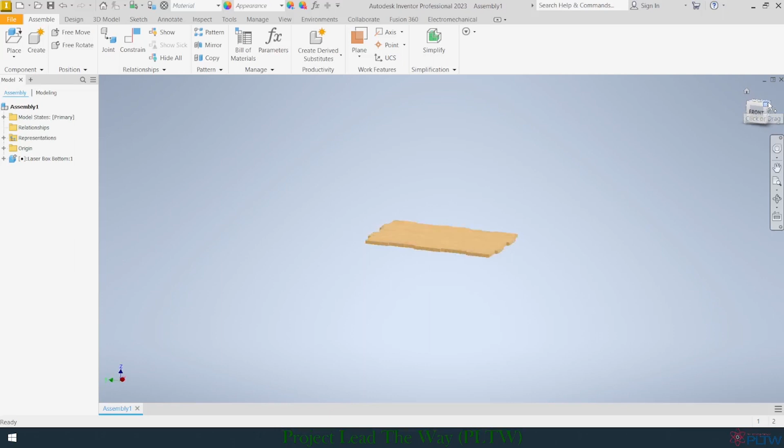Then once you hit the top right hand corner of your front view on your view cube, this should be your isometric view or your home view. So we will now right click on this corner and set view as home, fit to view. That way, anytime we hit the home button, it will always go to the isometric view based on the position of this bottom.

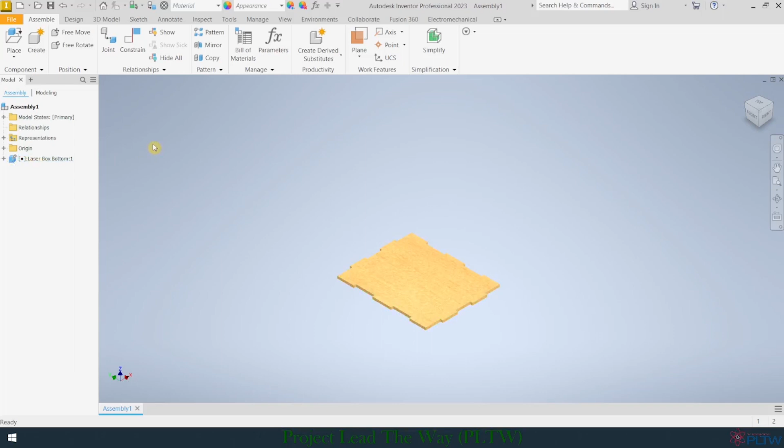Notice again that it is grounded, it has the tack mark. Let's begin assembling the box. I'm going to go to Place, and I am now going to bring in the back of this box, and I'm going to hit Open.

Next, you will want to go to Constrain, and if we zoom in here and move the boxes around a little bit, I'm going to use my view cube to rotate the view so I can see the back of my box. I'm going to choose this face right here of the back of the box, and hit Apply.

I'm going to go back to my home view just to see what that looks like. Obviously it is assembled and mated together, but it's still able to float around. The cool thing about Inventor is you can easily move the pieces around so you can see what you need to constrain next.

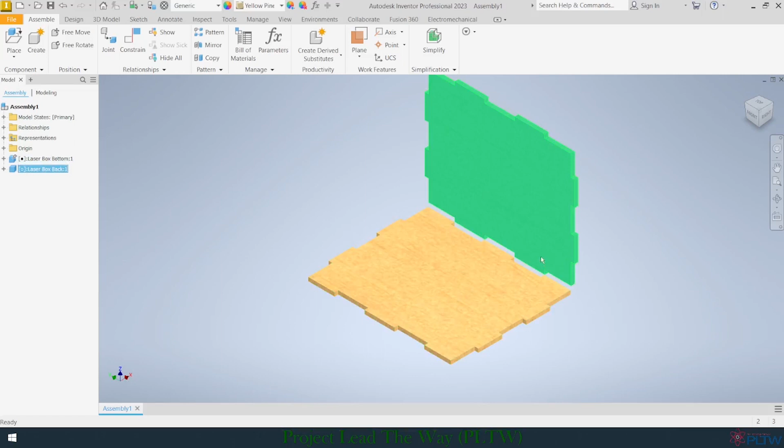So obviously you can see the teeth right here are going to be interlocked together. That gives me a good way of figuring out what I need to flush to lock this back piece into place. So the first thing I'm going to do is go to Constrain, and in the Mate constraint, I'm going to choose Flush.

I'm going to choose the side of this box, the back of the box, and then the side here of the bottom of the box, and I'm going to hit Apply.

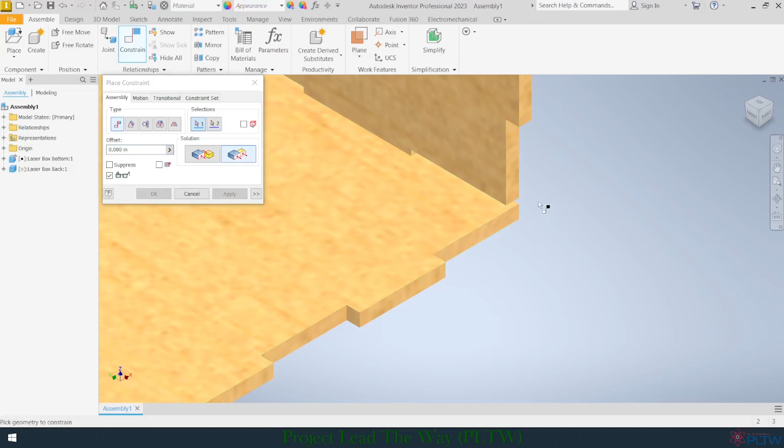The reason why it's off is because we need to flush the back of the box. So I'm going to do that by going to Flush. Actually, we need to do the bottom. So I'm going to flush the bottom of the back piece right here to the bottom of the bottom and hit Apply.

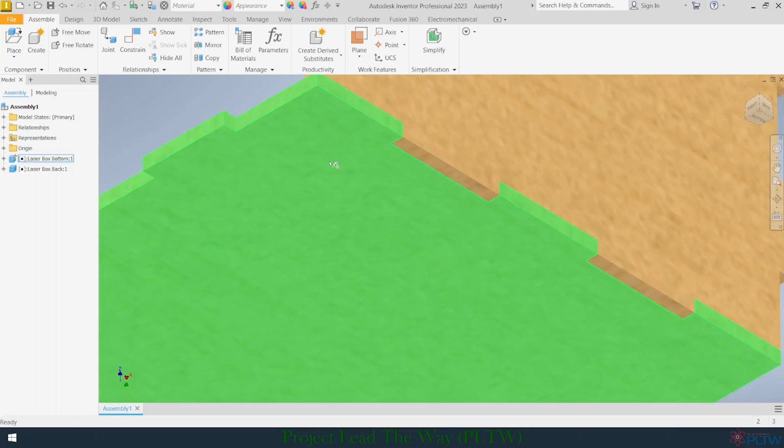If I cancel out of this, now I can hit the home button. I can try to click on this box, the back of this box, and try to move it away, and I cannot. So now we have our back attached.

Next, let's place the sides or the ends of the box. I'm just going to do one at a time, but basically what I want to do is go to Constrain and repeat the same steps that I just did, just on a different side. I'm going to choose this side face of the box and use my view cube to rotate this around, then choose this part of the box, and hit Apply.

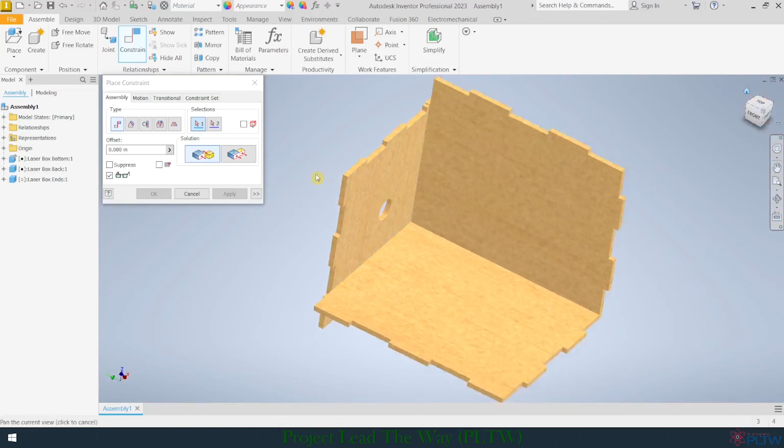Again, you can see that it's able to move around. Looking at the teeth gives me a good idea of where I need to flush the box. So I'm going to go to constrain, go to flush, and flush the front of this end piece to the front of the bottom of the box, then click apply.

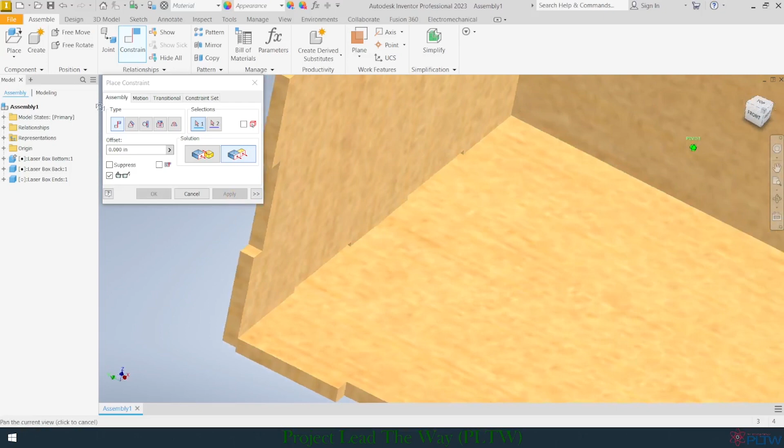I'm going to tilt this around so I can see the bottom of both pieces, and place a flush constraint. Notice on mate, this is the flush option. I'm going to choose the bottom of this end piece and the bottom of the box, and hit apply.

I'm going to hit cancel, and you'll notice we have a side, or an end of this box, placed. Next we need to do the other side, so I'll go to place and choose this one. This time I'm going to change it up a little and show you a simple feature.

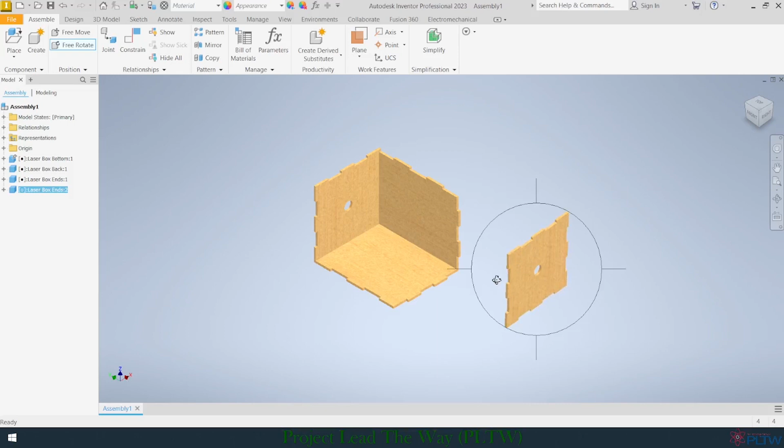I'll hit escape to get out of placing another piece. This time I'm just going to rotate. Maybe you want to rotate your pieces, so I'll go to free rotate. I'll click on this end piece and tilt it up and around until it looks a bit more like how I think it should, then right click and click OK.

Now I'm going to flush or mate this side of the box, this face here. Then I'll rotate this view around and choose just the side of the end, and hit apply. Let's go back to the home view, and you'll see how far off we are.

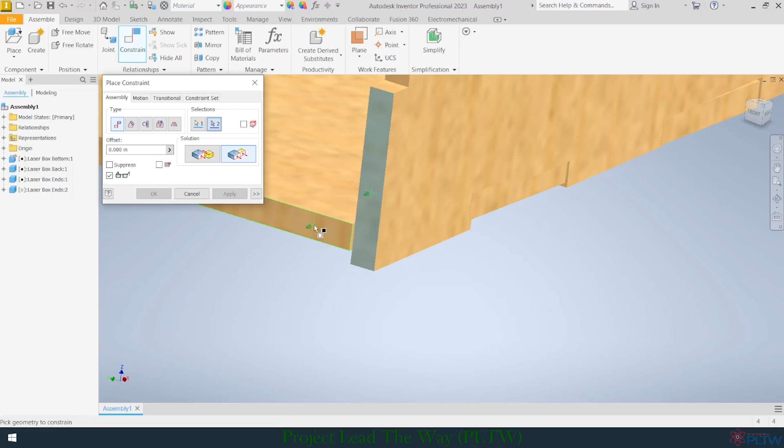I can move it around and slide it into place, and this gives me the ability to see where I need to place some flush constraints. So again I'm going to use the front here of these two. I'll go to flush and flush this end piece to the front of this bottom piece, then hit apply.

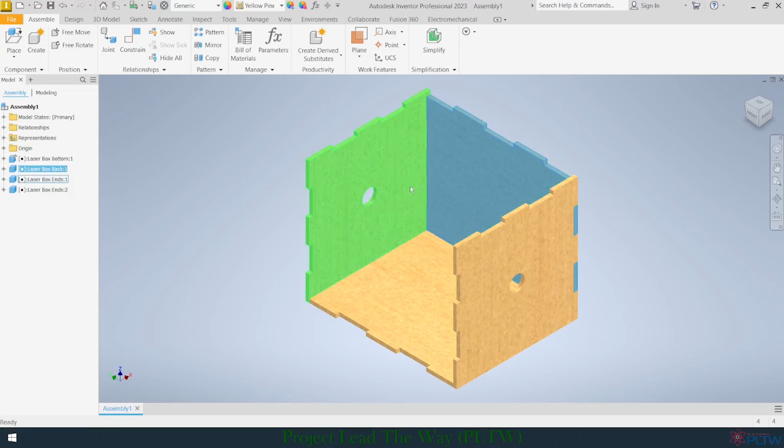I'm going to tilt this up and place a flush constraint from the bottom of this end piece to the bottom of the box, and hit apply. Hit my home view, hit cancel, and see if I can move this around. I cannot, so now I'm ready for the top.

Before you bring your top in, each student's box will be different. Some of you may only need a top with 2 followers coming out of the top, some will need a top with 3 followers, and if you really push the limits and wanted more than 3 holes, however you redesign the top, you would need to bring that top in.

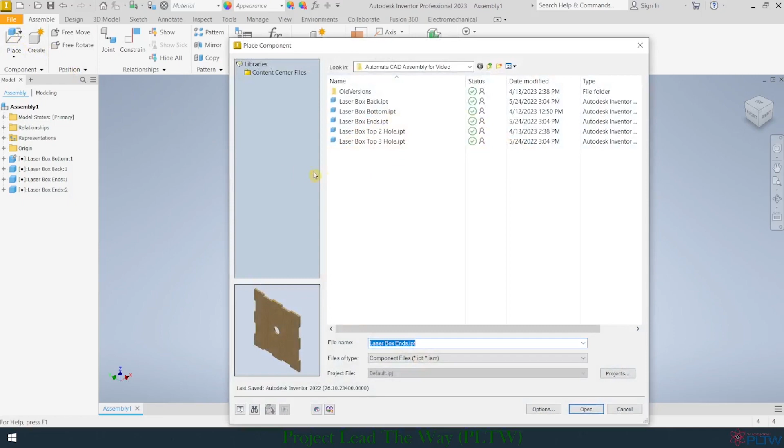I'm simply going to go to place and choose the 2-hole top, hit open, and then place that object, or that top, in.

Next I'm going to place some constraints, very similar to what I've done before. You should be able to visualize it like a puzzle piece, how these pieces go together. I'll go to constrain and just choose this piece here. I really could choose multiple options, but I'll just choose this piece, then rotate my view up so I can see the bottom of this, choose the bottom there, and hit apply.

I'm going to go back to my home view and hit cancel just so you can see how it looks. That's kind of how we want it, but I'm going to slightly slide it out of place.

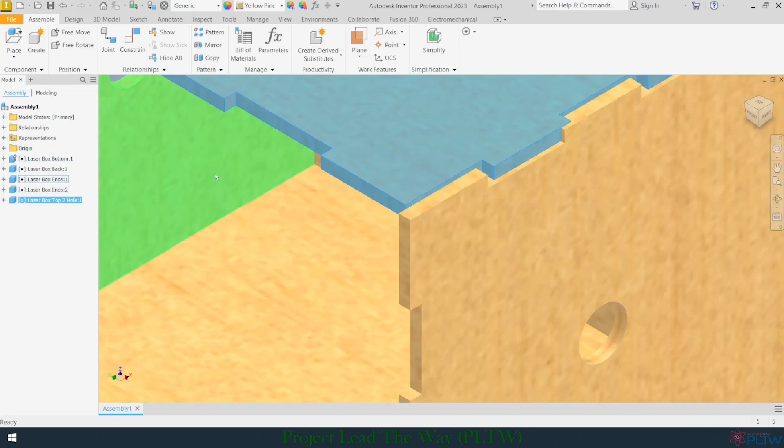So that when I use the constrain option again, this time I'm going to choose flush. I'll flush the side of this top piece to the side of this end, hit apply, then place a flush constraint on the front edge here to the front edge of this end piece, and hit apply.

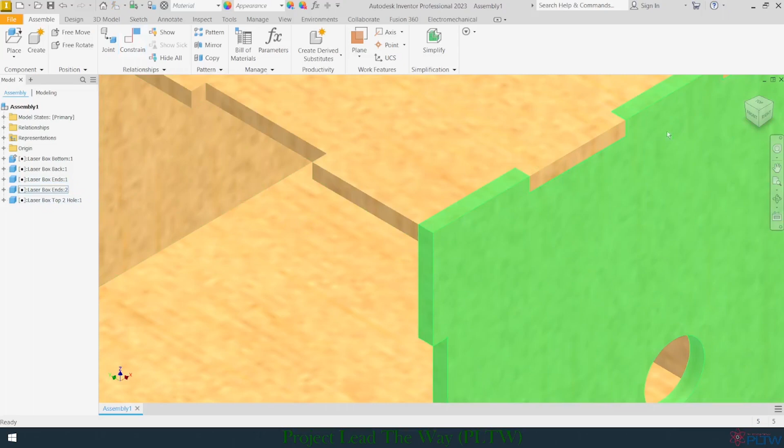Let's see if we can move anything around. I cannot, so now the box is assembled. We will not place a front side of this box, because we want to be able to see into it and see the cams working as we rotate the crank around.

One thing that may be useful as you move forward and begin placing pieces is to either turn off a piece visually or make it transparent so you can see through it. I want to show you how to do that. For example, I want to make the top transparent, not turn it off.

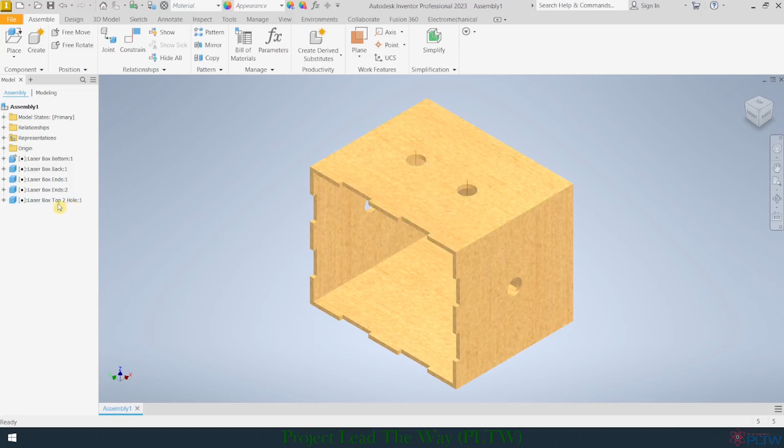If I wanted to turn it off, I could right click on this piece and uncheck the visibility, and it would turn it off. But I want to turn it back on. Instead I want to make it transparent, so I'll right click on this piece and choose transparent. That way I can see through it. It looks almost like a piece of glass.

Next, I'm going to do the same thing with the ends. I'll right click and choose transparent for that piece, and then transparent for that piece. Obviously this is not permanent—you could turn it back on. So when we go to place the next pieces, you could easily turn the transparency off to see it in a more normal fashion.

But that's how you assemble the box for the automata.

At this point, you will also want to save what you've done. Go to the disk icon and hit save, saving your file wherever you are saving your work—hopefully in your OneDrive. Click on your OneDrive folder using this drop down option, and save your work wherever it should be. I'm going to save it and call it Automata Assembly, and then click save.

Now you should have an assembled automata box and your file saved, and you're ready to move on to the next part of the assembly.

Now let's insert and assemble the axle bushing. Before you begin assembling all the parts to your automata, you're at a good place to go to each part and add an axis or work planes to the various parts. For example, here is the axle bushing—you'll notice there is an axis that goes all the way through it, and there's also a work plane.

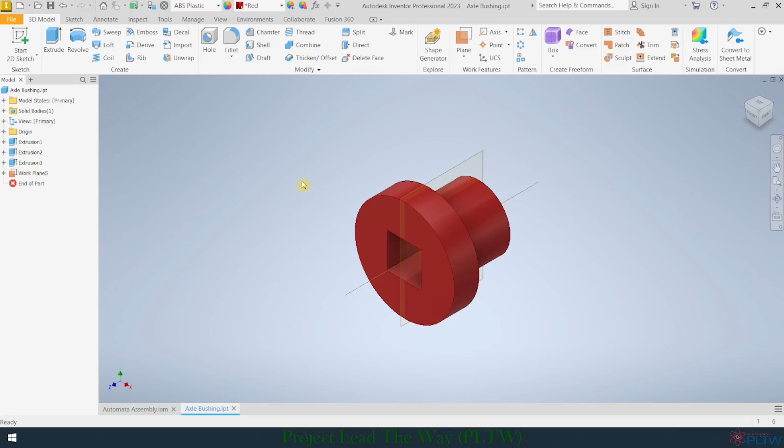You'll need to watch the video or get a demonstration from me in person to know how to apply these various things, but they will allow you to assemble the parts of the automata much easier with these in place for each part. Now let's go to place and pull in the axle bushing.

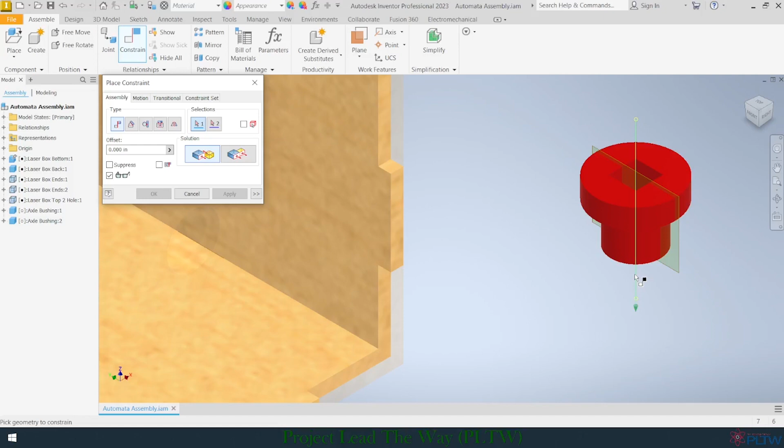I'm going to place one on the right side and one on the left side. Next, I'll go to constrain and choose this axis of the axle bushing, and then choose this axis of this hole on the end of this box. I'm just going to change the direction of this using the opposed option right here, and click apply.

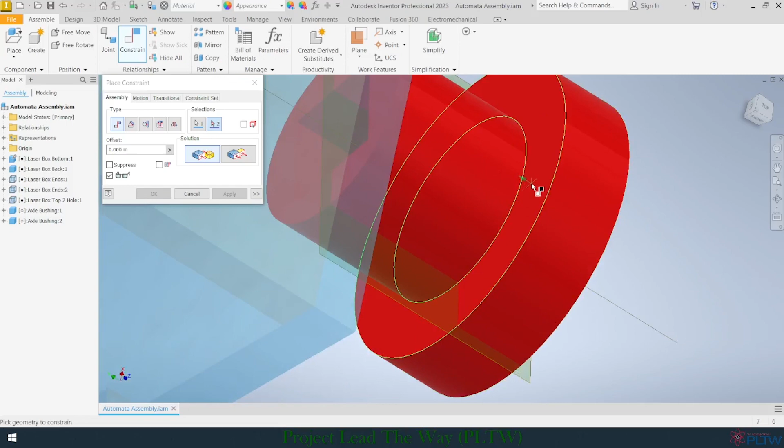Now you'll notice that this is now sharing the same axis as the axis of the hole in this end piece of the box. So I want to add a mate constraint to this wall and then into the inside face right here of the axle bushing. I'll hit apply. Now you will see that this axle bushing is in place and sharing the axis of the wall, the hole in the wall.

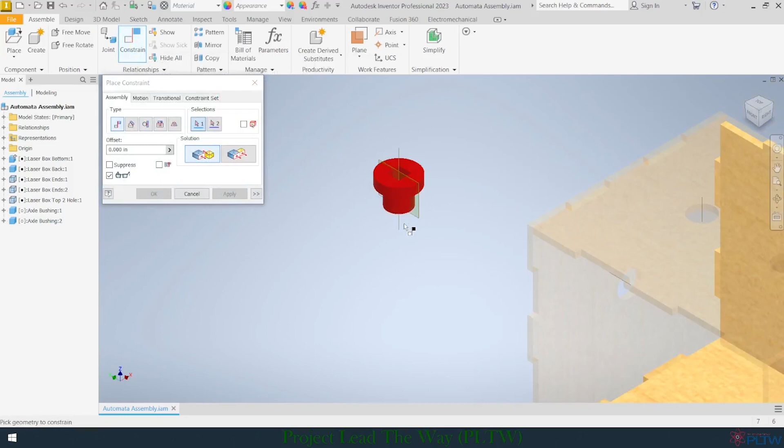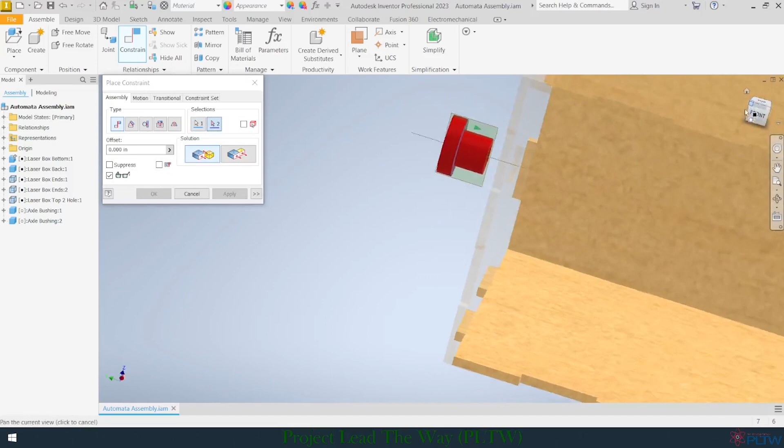I'm going to do the same thing with this axle bushing. I'll go to constrain, use mate, and mate the axis right here. I might need to tilt this up just a little bit. Again I'll need to use opposed and hit apply. Then I'll place a mate constraint on the inside of that, turn my view around, and place it here. Now these two axle bushings are in place.

Before we move on to assembling the other parts, I want to lock these two, or constrain these two axle bushings together. I'm going to go to constrain and place what is called an angle constraint, using the option here, undirected angle.

I'm going to choose this one, and then this one. They grabbed it there, so I want to make sure the angle is 0 - you'll see that right here. I'm going to hit apply. The reason I do that is so that when I turn one, the other will turn too, since they're kind of locked together. That way, when we go to add the axle, it'll help us and save us a step down the road. Now we're ready to add the next part.

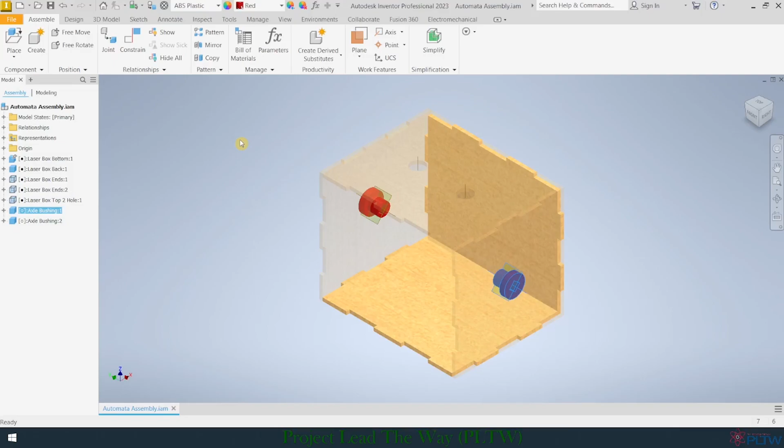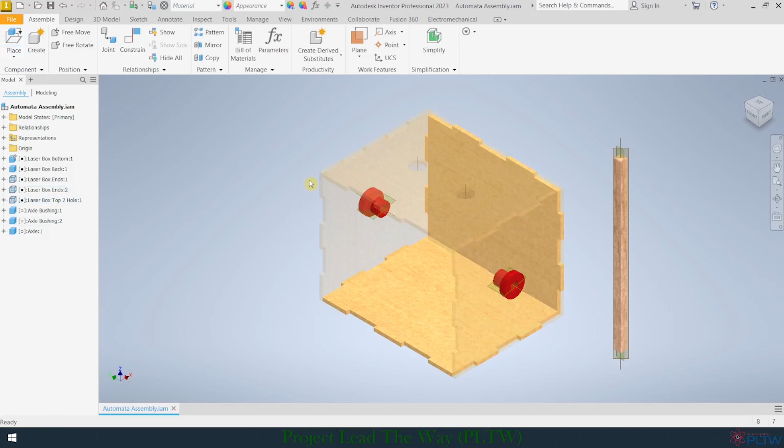Now let's bring in the axle and assemble it to the axle bushings. Go to place and insert your axle. Next, I'm going to place a constraint between the axis of the axle and the axis of the axle bushing. I'll choose mate, and mate this axle's axis to this axis, then press apply. I'm going to slide this over just so it will be moved around.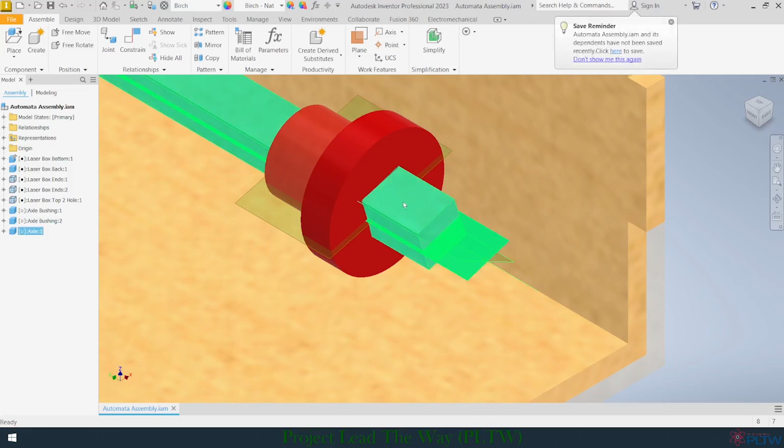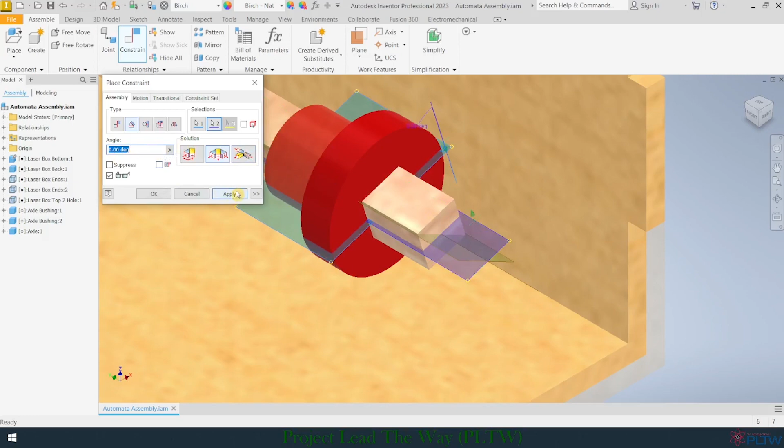It'll stick out a little bit. Now you can see it's sharing the same axis as the axle bushing, and as I rotate this around, you should be able to visually see that we need to lock in this work plane and this work plane together. To do that, I'm going to go to constrain, choose angle, then undirected angle. I'll just choose this work plane and this work plane, keep the angle at 0, and press apply.

Now let's bring in the crank and assemble that to the axle. Go to place and bring in your crank. I'm going to put it on the right side of this box, and free rotate this so it's a little bit more aligned to how I expect it to go onto the axle. It doesn't have to be perfect, obviously, as you can see.

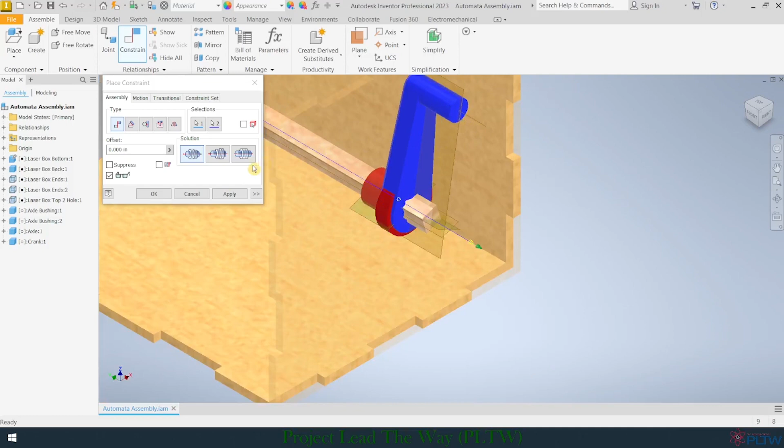I'm going to go to constrain and leave it on mate. I'll just mate this axis to this axis, and it actually ends up pointing the crank in the right direction. So I'll click apply. Then I'll cancel just so I can try to slide this over a little bit.

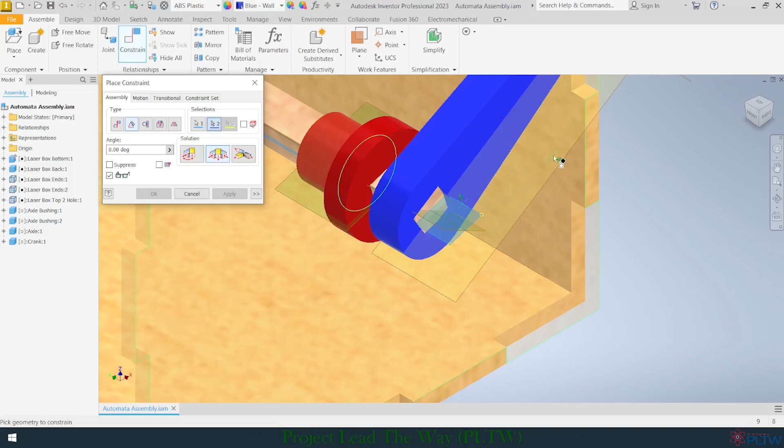Really what I want to do is lock angle-wise this work plane of the axle and this work plane of the crank. So I'll go to constrain and place an angle constraint, undirected angle, between this work plane of the axle and this work plane of the crank, to try to lock them in place.

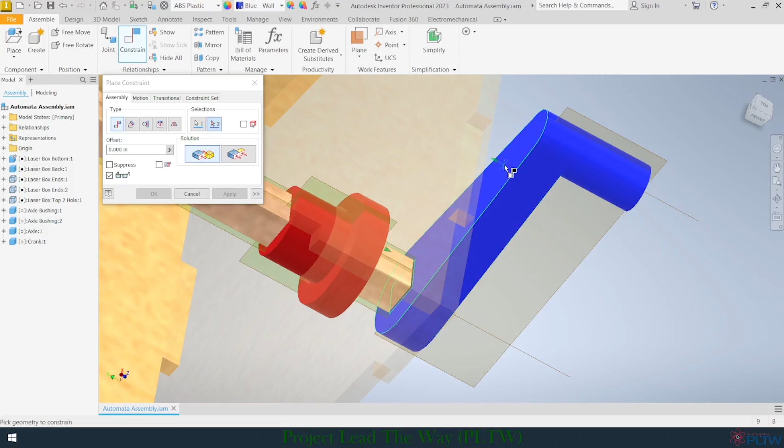Now when I turn the crank, I should be turning everything, but you'll notice it's sliding around a little bit. So I'm going to place a mate constraint between this axle bushing and this side of the crank, and press apply.

The last thing we need to do is place a flush constraint. We want control over how much of this axle is sticking out from the crank. So I'll go to constrain, use flush, and place a flush constraint on the outside of the crank here and the end of this axle. I'll type in 0.25, and once it sticks out 0.25, that's good enough for me. I'll click apply and then hit cancel.

Now if we zoom out and look at this, as we turn the crank, we can turn the axle. So that is the assembly so far of the two axle bushings, the axle, and the crank.

Now let's assemble the follower guide. Let's go to place. I'm going to bring in the follower guide that has 280 at the end - you may have seen that in the instructions. I'll hit open, and place two of these because I have two holes at the top of my box. If you have three holes, you will need three of these.

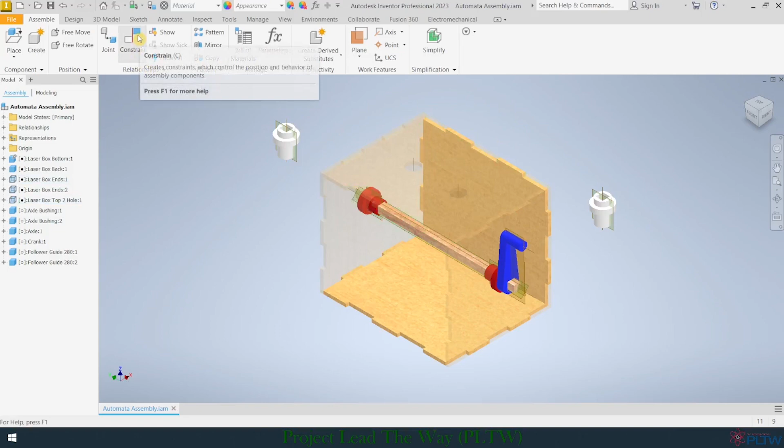I'm going to first constrain the axis. So I'll constrain the axis of this follower guide to the axis here, and hit apply. Then I'll do the same thing with this axis and this axis, and hit apply.

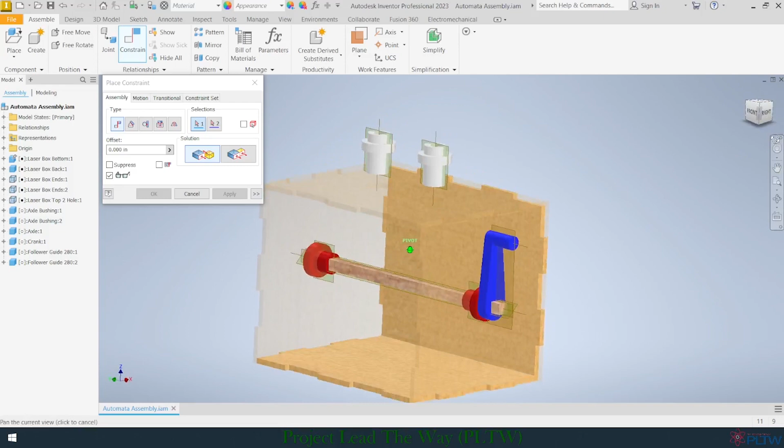Next, I'm going to tilt up a little bit so I can see the bottom half of this. I'm going to mate the bottom of this follower guide to the top of the box. Hit apply. Do the same thing for the other follower guide.

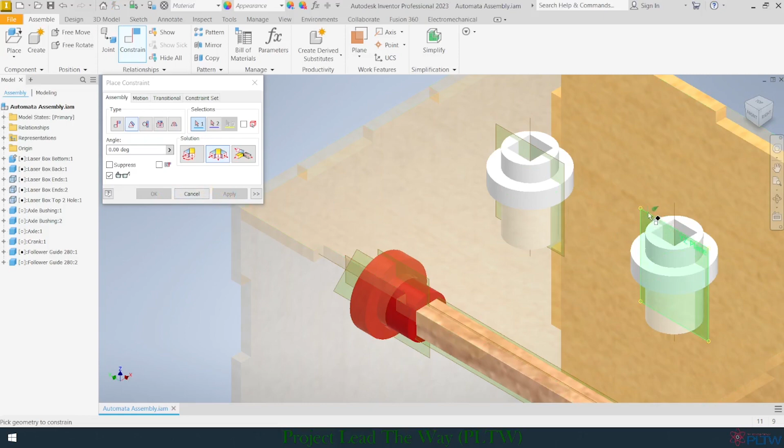Place a mate constraint here and then mate it to the top here. Before we move on, we need to place an angle constraint with this work plane in the front of the box and hit apply. Make sure I choose undirected angle here and hit apply. Then I'll place one here, again to the front of the box. That locks these in where they cannot rotate.

Now we're ready to assemble the follower and the cams and some of the other parts we have to add to our automata.

Now I'm going to bring in a follower, the roller, and my Mickey Mouse head. I'm going to assemble those off to the side and add those into the box as one whole piece. You'll see what I'm talking about as you see this demonstration. So I'm going to go to place, and I'm going to go to follower. I'm going to hit open. I'm going to place two of these.

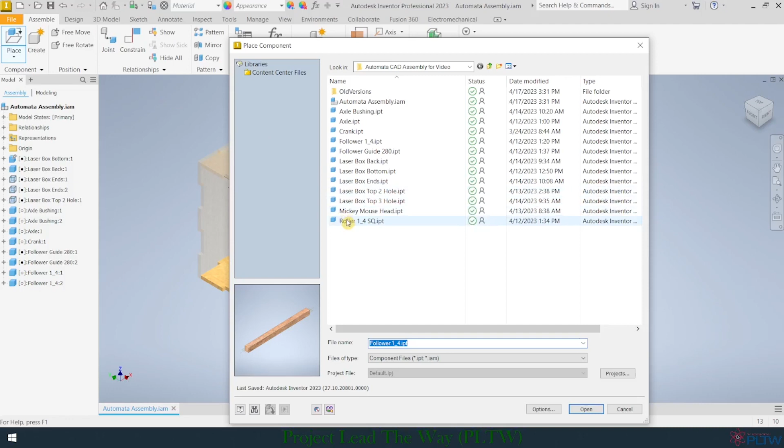I'm going to go back to place, and I'm going to place two rollers, one here and one here. And then I'm going to place two Mickey Mouse heads here and here.

I'm going to go to free rotate and just click on some of these parts and rotate them around so I can see how they're going to look a little bit more on the screen. I'll click on this one, rotate this one around. Doesn't have to be perfect. Let's see, I just want to get it close.

Now I want to go to constrain, and I'll start with the follower and the roller first. So I'm going to mate the axis of the two together. Going to hit apply. Now I'm going to place an angle constraint between this.

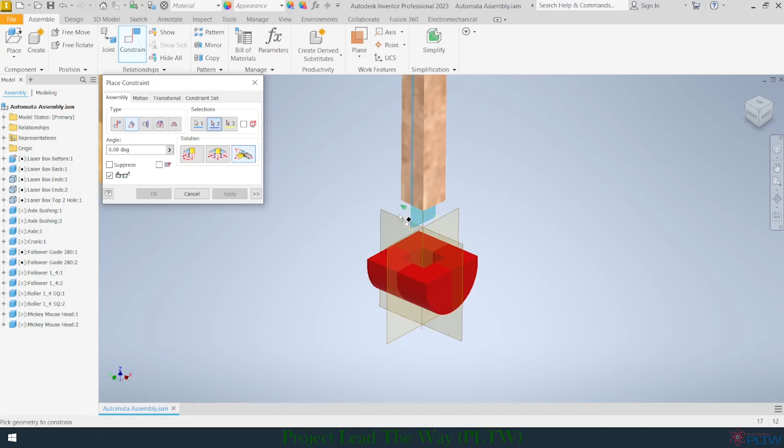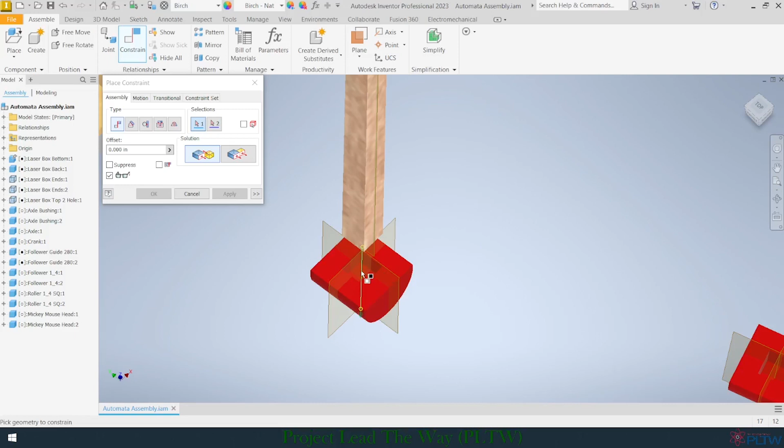I need to make sure it's undirected angle, and this. I want it to flip itself around. I'm going to hit apply, and as we see here, this is now sharing the same axis, it's kind of going through it. So what I want to do is place a mate constraint on the inside of this roller, to the bottom of the follower. And hit apply.

I'm going to repeat the same steps for the one on the right.

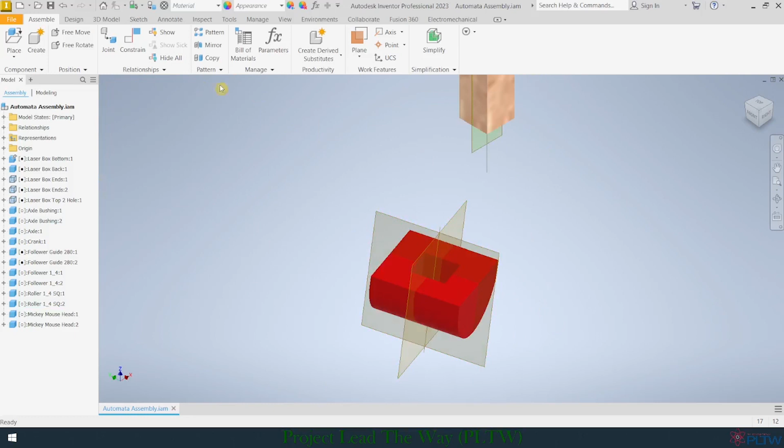Now I need to assemble the Mickey Mouse head using the axis of the two. Again, I'm going to slide. I'm going to ground just the roller, so that I can move this head up like I want it to.

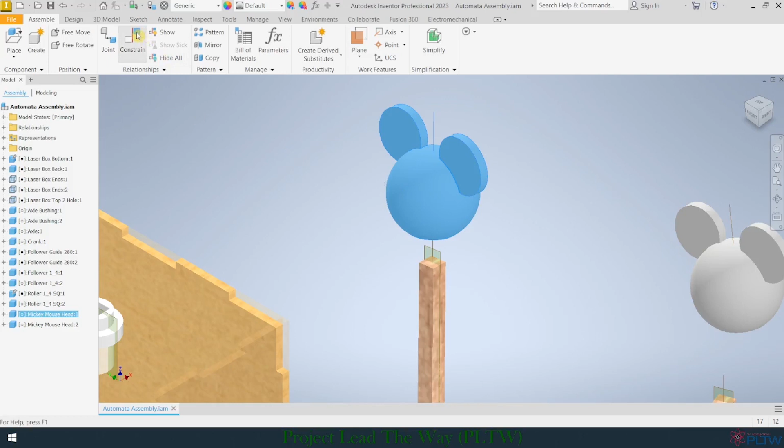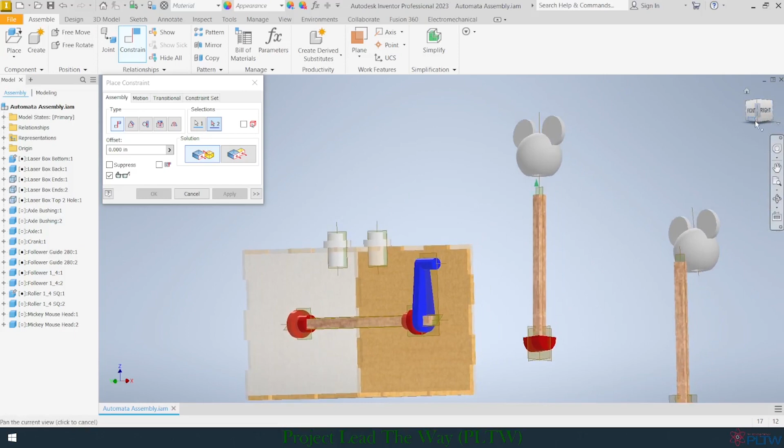I want to do several things here. I want to place an angle constraint on one of Mickey Mouse's ears here to this work plane here, and just leave it at 0. But I also want to place a mate constraint on the top of this follower to the inside of this head. I have to really flip this thing upside down. Click apply.

And then I will repeat the same steps with the roller and follower on the right.

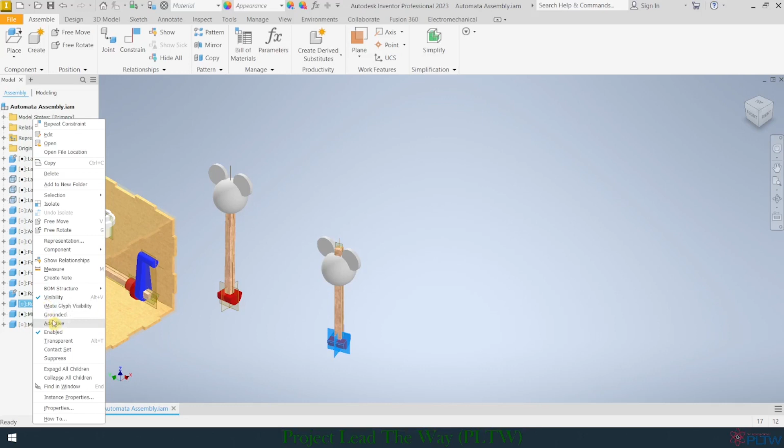I need to unground my two rollers that I grounded so that I could move them around, and I will now attach them to the top of the box going through the follower guides. So I will go to constrain, I will go to mate.

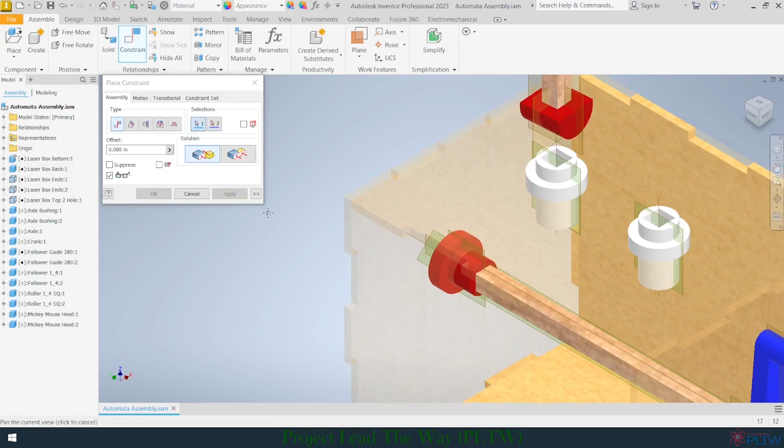Again, I will mate this axis to the axis of the follower guide. Hit apply. And then I will do the same thing over here with this one. Hit apply. You notice one's kind of going through it. I'll just pull it back up.

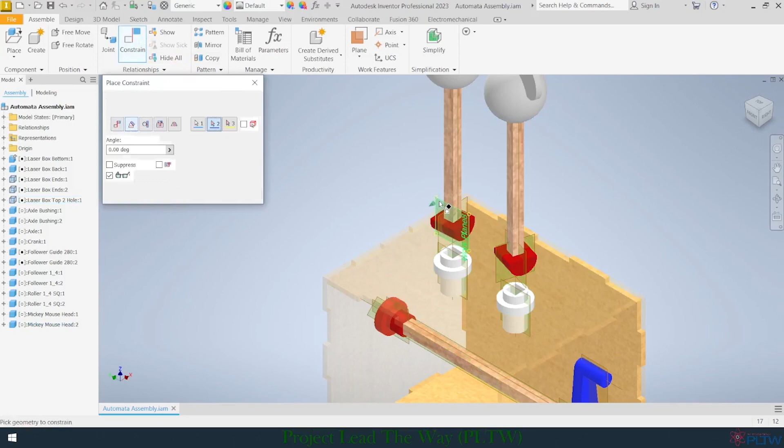Now what I want to do is put an angle constraint with this work plane. Actually it needs to be undirected angle. From this work plane to this one, I want to put a 0 angle. And then I'm going to do the same thing with this one. So now they are sharing the same axis, which is a little bit more what you would expect it to look like.

One thing I could do is put some other constraints on here so it doesn't go any further, but really what it's waiting on now is to get the cams on, and then we will assemble those. That's how you do the follower and the roller for the follower, and whatever animation you have, hopefully your steps will be very similar to that.

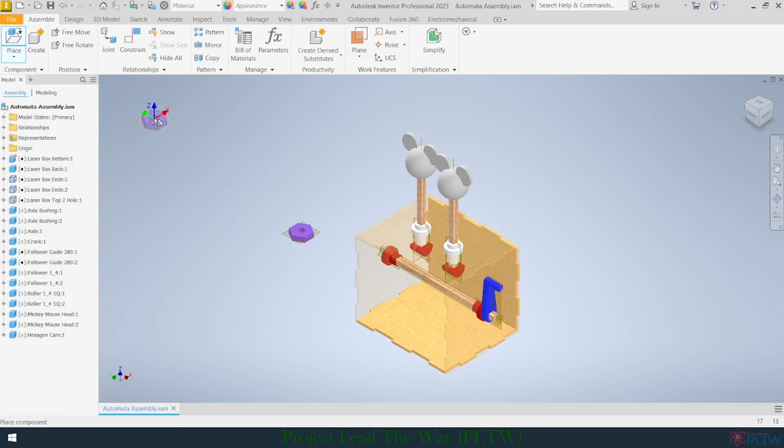Now let's bring in some cams. Go to place and choose which cam you would like to bring in. I will bring in the hexagon cam, and then I will bring in the pear cam. The same steps will be taken for any two that you choose. If you have two followers coming through the top, as I do, if you have three, you'll obviously choose three.

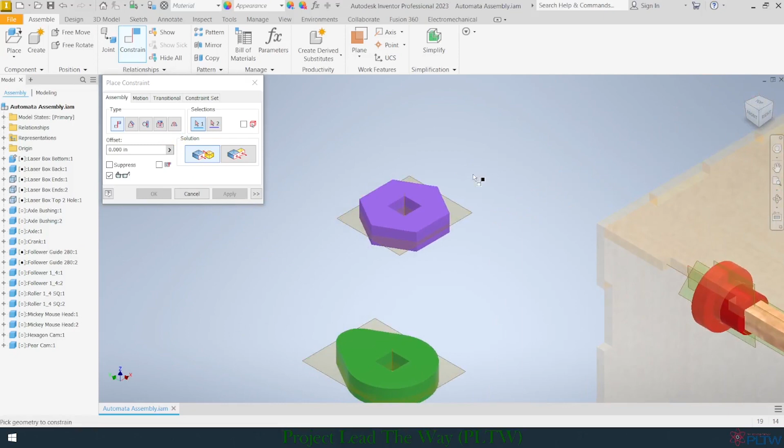I'm going to go to constrain, and I'm going to mate. There's an axis that I have made through the center of this cam. I'm going to mate that axis to the axis of my axle. So now it's sitting on there.

I'm just going to slide it on to the side here. Let's go about right there. Then I will do the same thing again. This time I'm going to mate this axis to the axis here and hit apply.

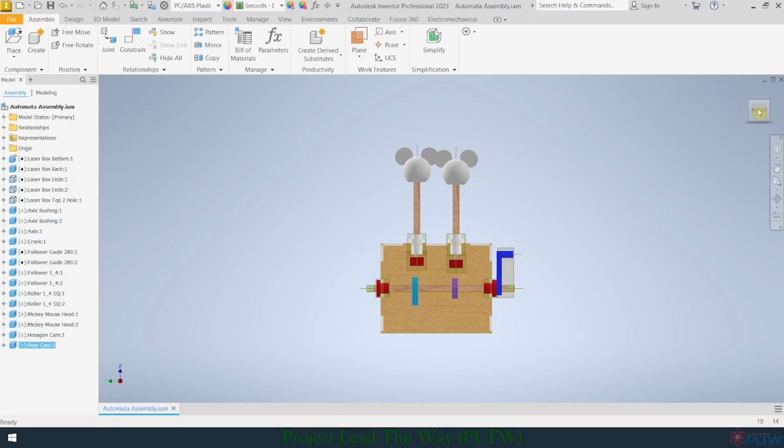We'll go to the front view, as you saw me do just a moment ago, just to move this around. So I'm going to need to slide this cam back off a little bit so you can see exactly what I need to do next.

You'll notice that I have a work plane on here. This will help me align this cam with the follower here, but I do need to turn it on, so I'm going to expand the Pear Cam, and right here when I created this axis I had to use two work planes to do that. I'm going to turn this one on.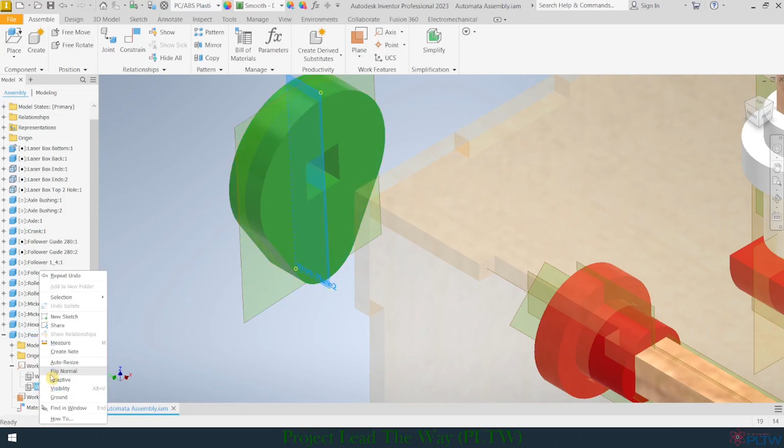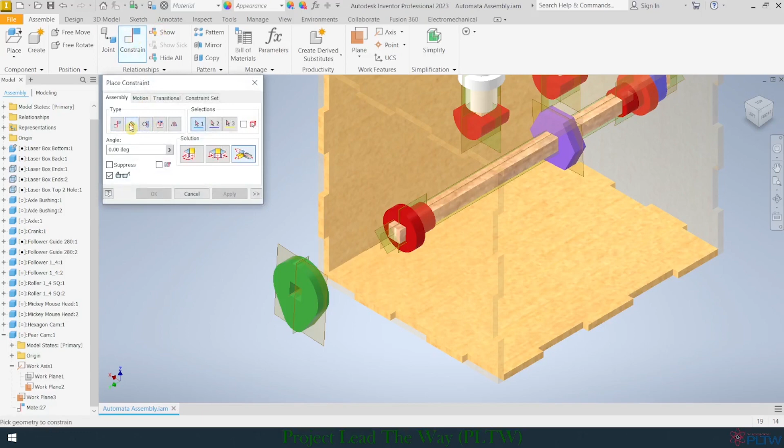This will allow me to match, so I'm going to put an angle constraint between—I'm not sure if you can see it, maybe if I flip around this way—this vertical work plane of the axle. I'm going to align those together or put an angle constraint between them. So angle, unidirectional, I'm going to choose this one here and then choose this. I'm going to make it 0. I'm going to hit apply.

So it should, when I rotate this, it should rotate the other. So I'm going to now slide this down, and then I'm just going to place a mate constraint between this work plane and this work plane right here, which will lock those two, or align those two: the center work plane of the follower, the red follower, and the work plane that goes down the center or slices this pear cam.

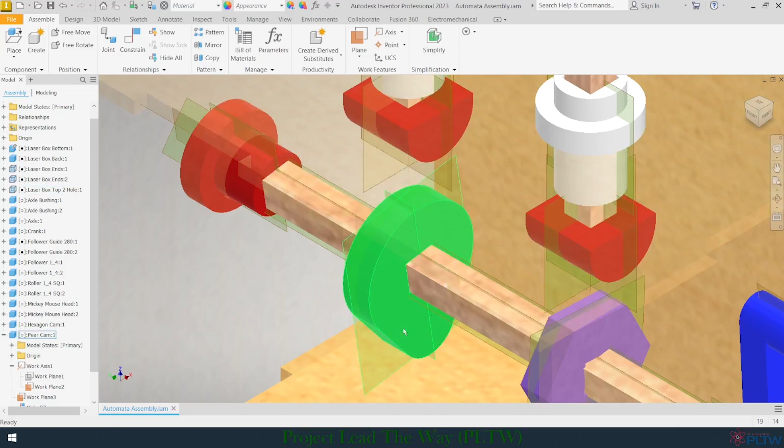So if we zoom out, we can see now that it's going to stay in place. I can't move this pear cam any longer. Next, we're going to tilt this up a little bit, and we're going to go back to constrain.

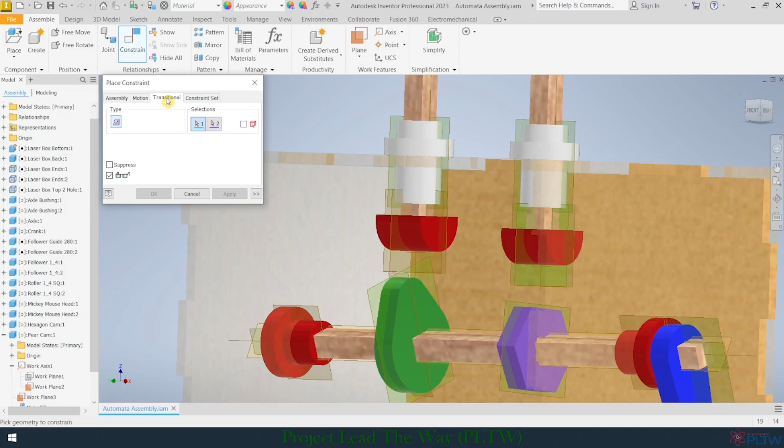And this time we're going to use one called transitional. So we're going to choose transitional, and we're going to choose the very bottom of the roller right here, and then just somewhere like this part of the cam that we want this to follow, this profile. And then we'll cancel, we'll go back to the home view.

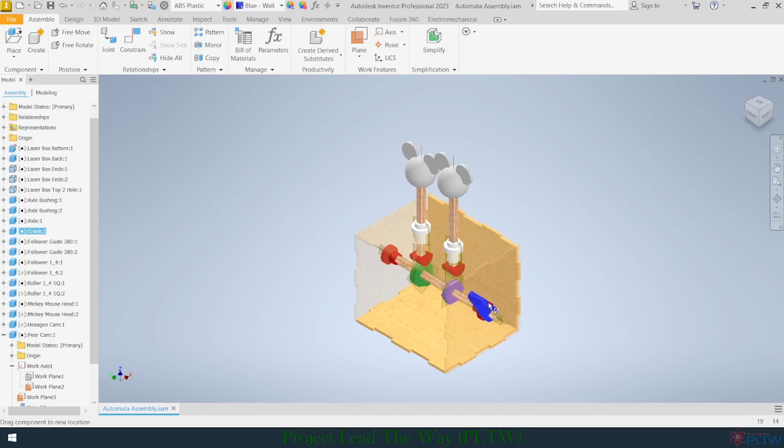And now as I crank this, you'll see that the follower for that side goes up and down based on the movement of that cam. You repeat sort of the same steps with the hexagon.

So we're going to move the hexagon off a little bit just so we can see a little bit more of what's happening here on the side. I need to turn on a work plane here so I can constrain the hexagon to the axle. I'm going to go over here to hexagon and open up where it says work axis 1, and I believe it's work plane 2 that I need to right click on and choose visibility.

I'm just going to slide this back on. Actually, what I'll do is I'll go to constrain, and—I've already tried this, so I know which one I need to use—but just a minute ago I used mate to mate this plane to this plane, but for some reason it's not working with this. But if I go to flush, it will flush it. So I'll do whatever I got to do to get this thing in the right place.

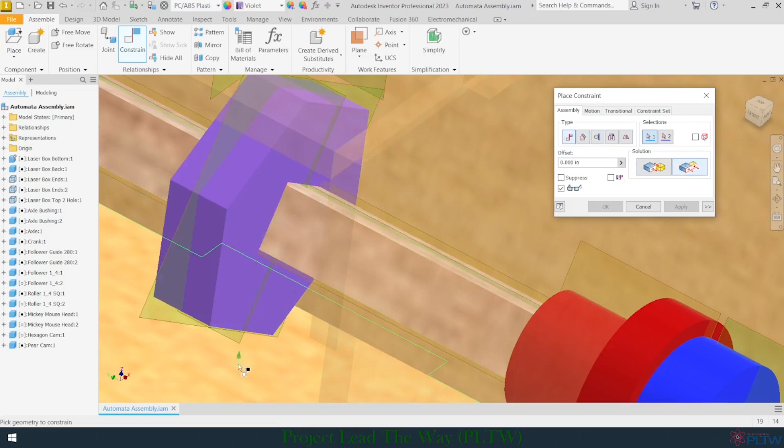Now I need to constrain this so it isn't free spinning here. It needs to be constrained to the work plane of the axle. So I'm going to place—let's try flush. Let's see if I can put a flush constraint with this and this.

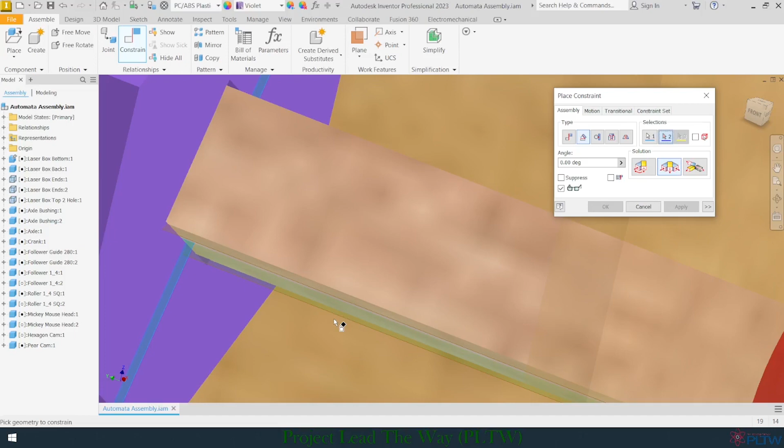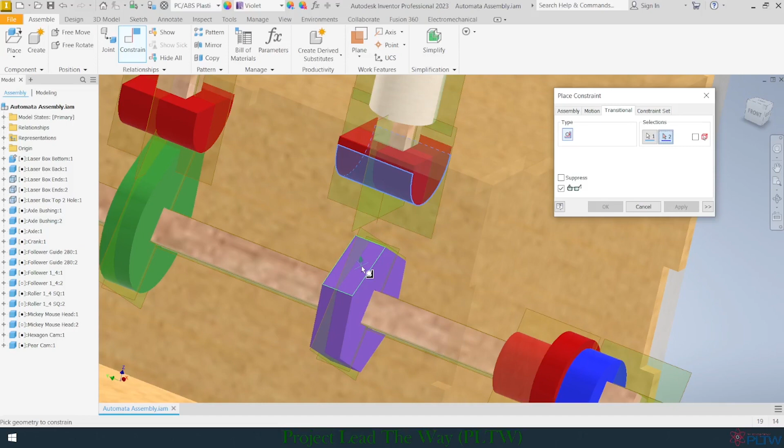That doesn't look like it's going to work. Let me give myself a little more visual here. I'll try an angled constraint between this and this. There we go. We'll do angled, unidirectional, leave it at 0, and hit apply. Let's hit cancel and make sure all of this turns together. It does. Last thing we need to do, and I don't need to zoom out far for this: constrain, transitional, and I'll choose the bottom of the roller and this side of the hexagon, one of these six sides. Hit apply, and then hit home view.

Let's try rotating this, and now we'll see that the heads are bouncing around. So this is a point where you're going to want to decide if you need more movement or not. One way you can provide more movement is by making your cams bigger. As I rotate this around, I can see that I could actually make this pear cam a little bit bigger.

I'm going to double click on this pear cam. It's going to take me into this drawing as if I'm working on it. I'll hit the parameters button and go into where I put 1. I'm going to make this 1.5, just to see what this does. I'll hit done, hit return, and it updates itself.

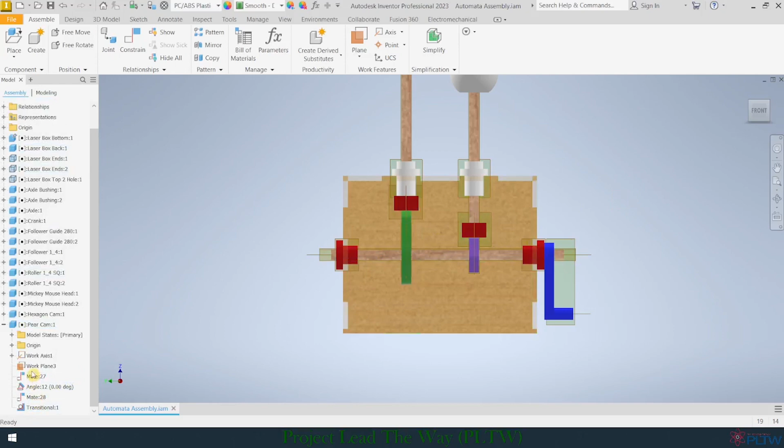That looks a little too big, so let's go back to pear parameters. Let's try 1.25. Hit done, go over here, and now hit return. And now let's rotate this thing. I should get way more movement out of the pear cam.

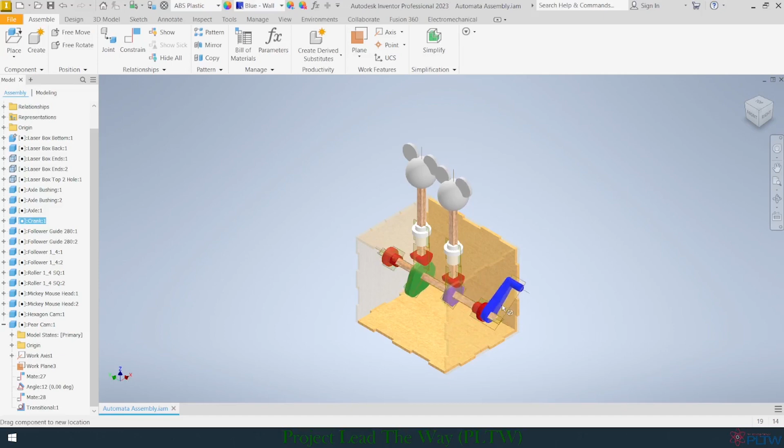Let's say the hexagon needs to be a little bit bigger. I can come over here and double click on hexagon and go to parameters, as if I'm in the hexagon part, and this allows me to go in here. Let's try 1.5, then hit done, hit return, and rotate this around. So now you can see how you can manipulate the size of your cams based on what you need.

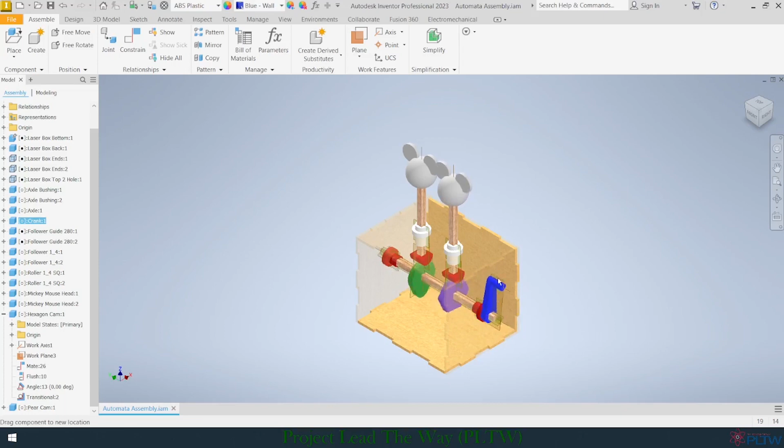Just one final thing I noticed for mine, and you probably need to make these adjustments too. On the Mickey Mouse ears, you'll notice that they're actually hitting each other. Obviously, I wouldn't want that. So I'm going to open up the first Mickey Mouse head, and this angle constraint that I put, I might just come in here and type a 45-degree angle and turn it to the side. Then go to the other one, open up this angle constraint, and try -45. So they're kind of facing away from each other. I think that looks a little better, so when I rotate this, they're not really hitting each other.

So that's how you do a general assembly of the various parts of an automata. Obviously, whatever you do at the top of your box needs to be simulated in some way. This is just how I chose to do mine. I just chose these two simple objects that bounce up and down for movement. But whatever you choose to use for your animation, you want to be very thoughtful about how you would assemble that to your box and simulate that type of movement. Hopefully you'll find this helpful as you try to assemble the parts of your automata.

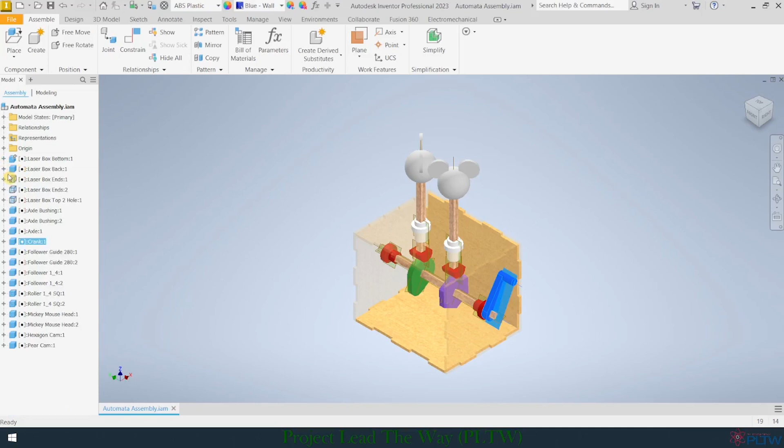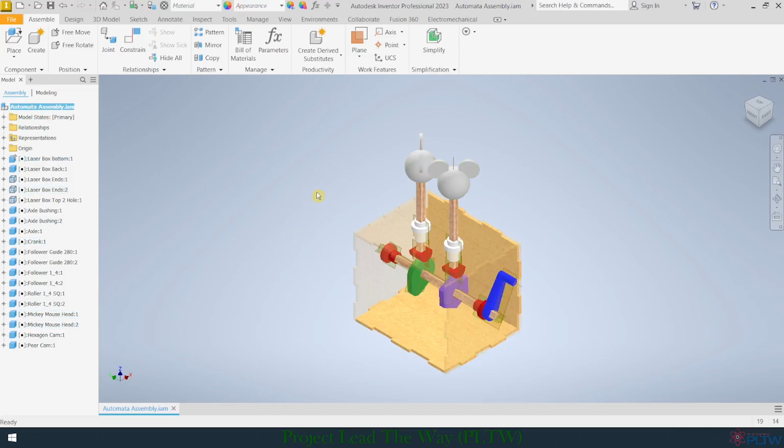One of the final things to consider before finishing your assembly is turning off all the axes and work planes for each part. To do that, open up the different parts and see if you see any axis. We'll go to the ends - I believe the ends have a work axis, so I can right click on this and uncheck its visibility. You'll want to go through each part, for example the axle bushing, and right click on these work planes or axes to turn off their visibility, so that your final view will be all the parts assembled together with no axis or work planes on. That'll just look better when you go to put it on your sheet.